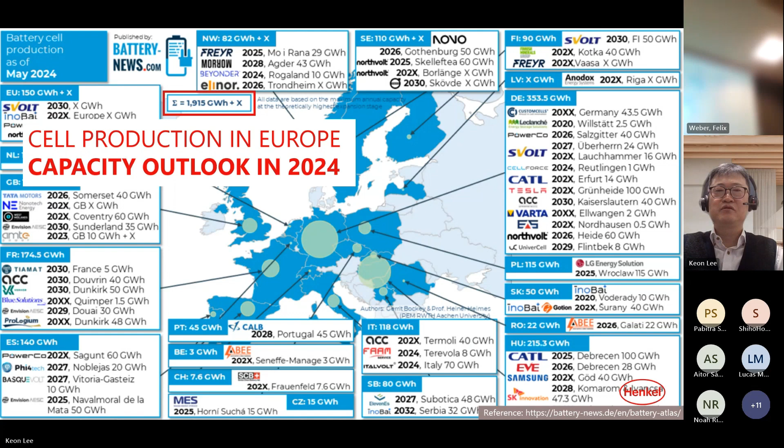Everybody is looking at this map, right? There are really a lot of projects for cell manufacturing inside Europe. And this is the picture which was recently published by Battery News. So there are still a lot of projects, and the total capacity until 2030 or so, you can expect actually 2 terawatt hours. But if you take a little bit deeper look, the numbers start to change. There are some projects that are already on hold or delayed in Europe. First, because of the slowdown in the front end industry. And secondly, some stresses from other regions, other continents. You can see that.

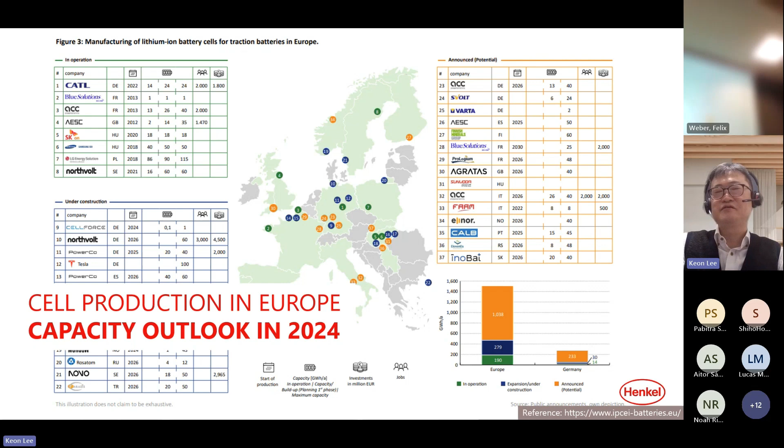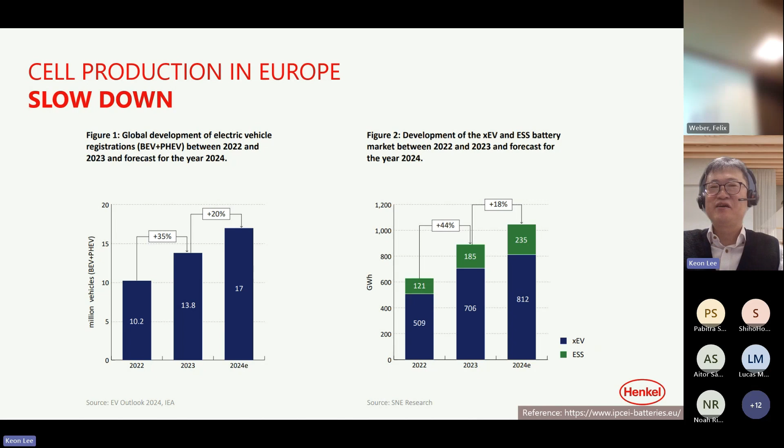So this year is pretty tough because we are seeing some sort of slowing down of the growth, because these numbers for this year were estimated last year, but this year I'm pretty confident that the numbers are much lower than this. And why? This kind of slowing down affects all other industries because they have to hedge the risk, and then you can see not really promising news here and there, starting from the company who canceled the plan to build a battery factory here in Europe, and also some not really good news about other companies. And ACC also just put some projects on hold. So this is a pretty difficult time.

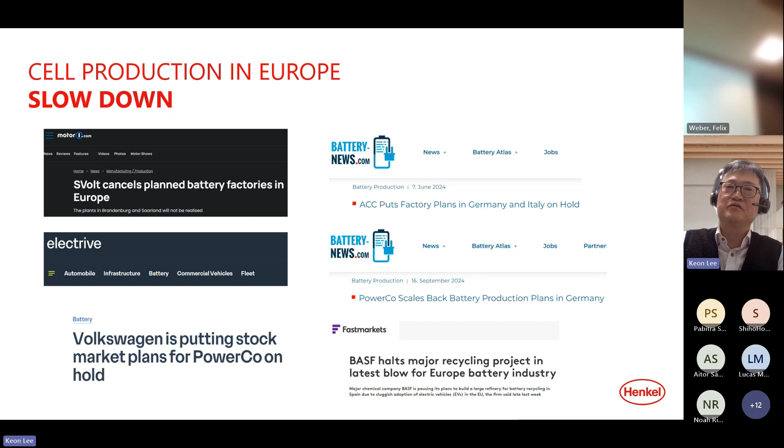And this is a massive one. And you can see some concerns about the future capacity. But I don't think it's a really bad sign, because when I just got here in Europe, I saw all those crazy numbers, and I thought, okay, that's just too much, because demand is demand, and capacity is capacity. They have to match, but the sum of the whole capacity did not match with the demand in the market, and also the supply chain maturity was not there. So I don't think it's a slowdown. I think it's more about the market being realistic, or more responsive to the customers.

So when it comes to the risk hedge, you can see actually almost half of the capacity, because of the slow consumer uptake of electric vehicles and also the competition from Chinese cell manufacturers. So today's focus is two things. The first, how we can do it better. Actually, just one, to be honest, because to do it better, we have to do it differently. So I'm going to talk about how we can do it better by doing it differently.

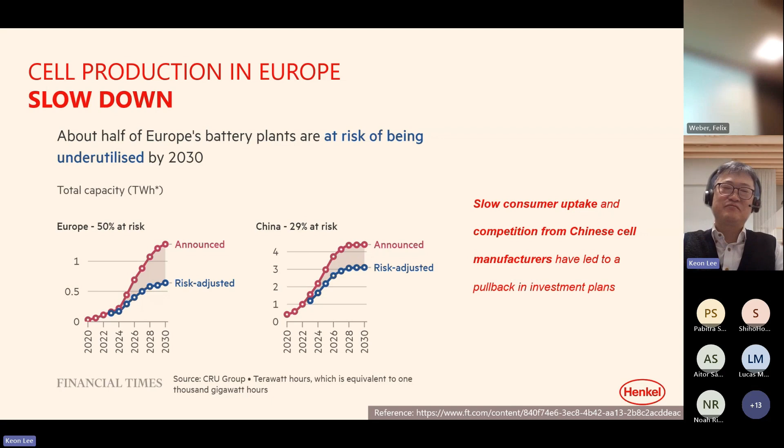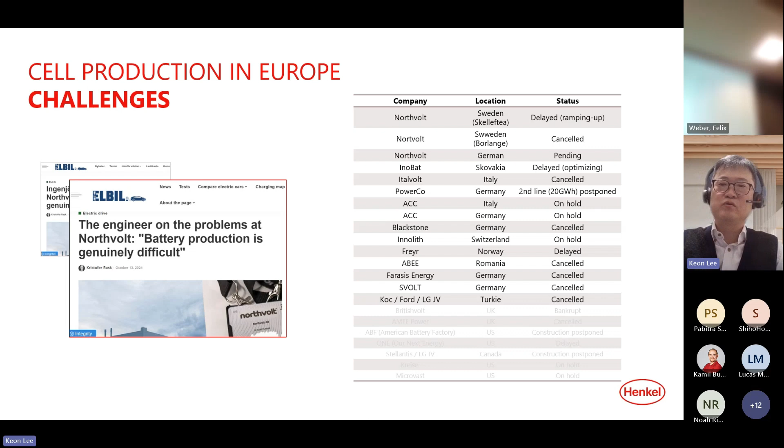And also, there is other news about Northvolt, which is not good, but a harsh fact showing how difficult it is to build up cell production capacity here in Europe. So Northvolt is struggling. I don't think it's going to fail, and I really hope that Northvolt will come back to its normal state, and there are a lot of other projects that are on hold, delayed or canceled. And this is pretty much provocative, so I'm just murmuring this. Recently there was an interview between one company and the CEO of CATL. And just take a look at the question.

What are the problems? I cannot recall the exact questions from his side, but he was asking why it is difficult to build good, decent cell manufacturing capacity here in Europe.

And the answers from the CEO of CATL were like this. First, wrong design. Wrong design means the wrong chemistry, or some wrong components, or the wrong constitution or architecture inside a cell. He made a second answer too, but let's approach it differently.

Secondly, he was talking about the wrong equipment. We have a lot of things to do, right? And thirdly, he was mentioning the wrong process too. But actually, I don't think the process and equipment are different things, so today I want to address them at the same time.

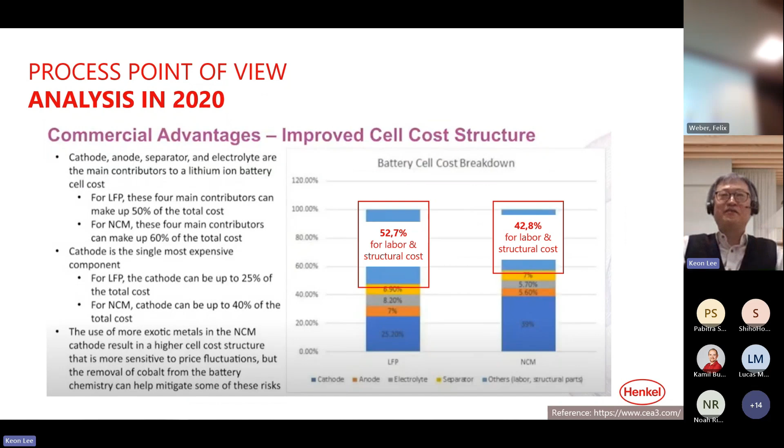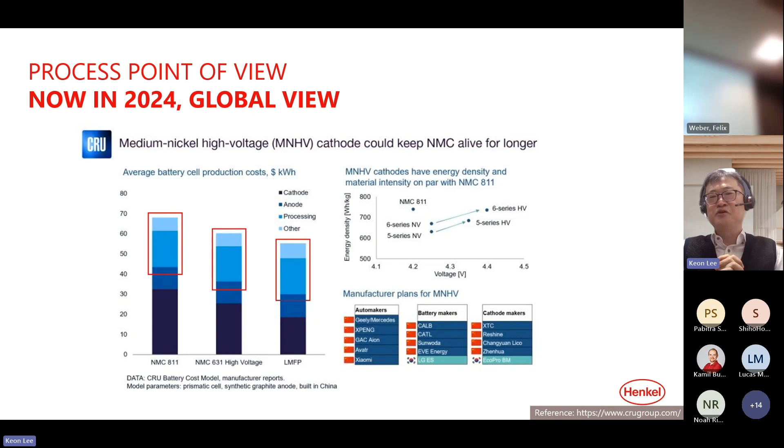We have to deal with this number. So let's go back to the global point of view. Someone thought that we could have many chances to improve a lot, but this is the harsh reality for our competitor—or maybe benchmark partner—and they are based on this cost structure.

Material cost, here in Europe, if you source from Asian countries, will definitely increase. But the structure is the structure. So even with increased prices of all the materials and components, you also have to deal with the increased price tags on energy costs, labor, and whatever.

Then how can we overcome this? There's actually one small factor that is highly likely neglected. I really love this article by Professor Kampker about how likely teamwork is to produce results, and then he was stressing the scrap rate.

Why is it important? You can read the sentence with the red line. The scrap rates in battery production are high, often around 30% when production starts. But as the process becomes well established, it goes down to 5 to 10%. Currently the leading companies are showing better numbers—they're not sharing the exact figures, but everybody says it's less than 3% in the fully established and stabilized lines. Typically it takes 2 to 3 years to get to that limit.

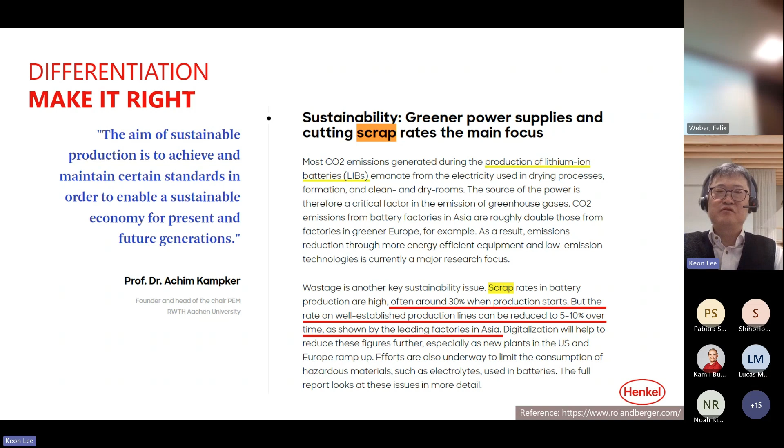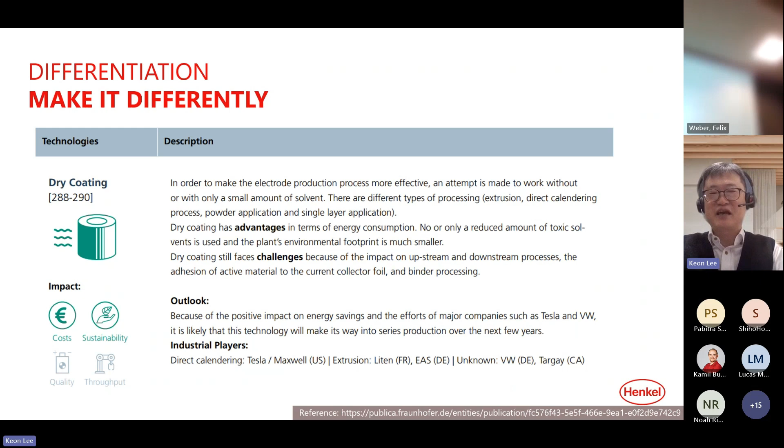And the second part would be interesting, because you can also think about other processes—dry coating. Maybe many of you, or all of you, have heard about this technology because Tesla made a really big one. But this technology has a longer history and legacy, and by the way, they started to use it.

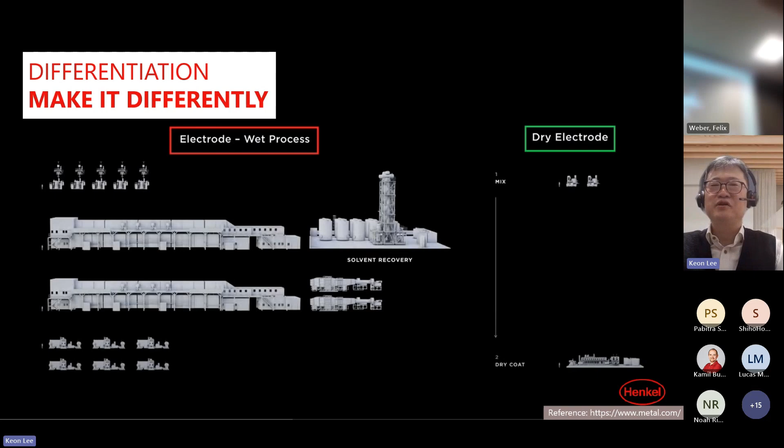They made this technology a big thing during their Battery Day, I think it was 2020. They compared the conventional technology with the dry electrode process, and the rough numbers we learned came from this presentation by Elon Musk.

Roughly, you can reduce the cost by 20% if you switch from wet chemistry to the dry coating process, and 50% of the CO2 will be gone. So this is a very promising technology.

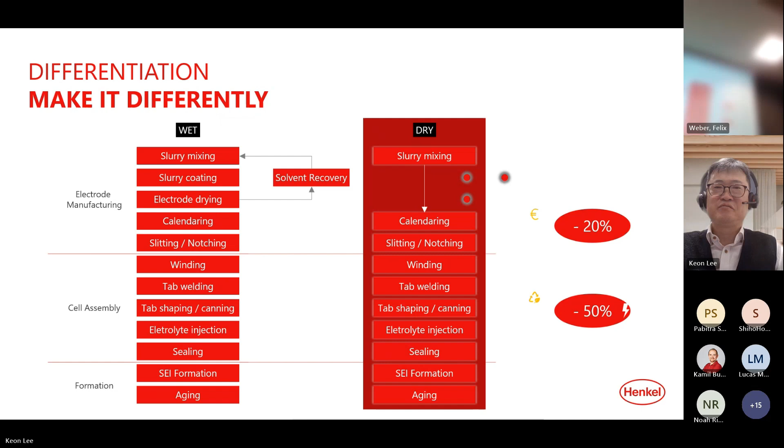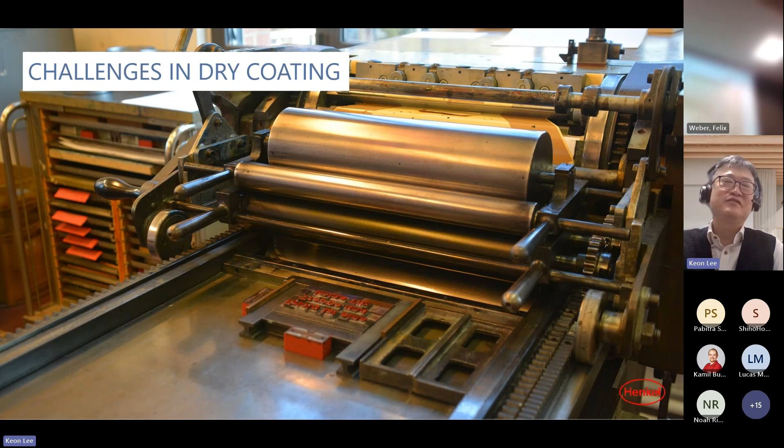But there is a trap, actually. There were a lot of challenges which have not been solved yet. I don't know how much you know about this company's current status, but two years ago they stated they started mass production with the dry coating process.

But actually there was a rumor that this process was used only for the anode side. It wasn't proven, but this year it was fully proven by their statement, because they posted on X saying 'first prototype Cybertruck with in-house dry cathode 4680 cells.' So they had been outsourcing the dry cathode, which means they failed to launch this dry process for the cathode when they started mass production.

But this is odd, right? Almost all the benefit, 90%, is based on the cathode side. But the dry electrode process wasn't used for the cathode side, which means the benefit was gone. Maybe in the worst case, the benefit wasn't even there yet - maybe only the disadvantage. Who knows, right?

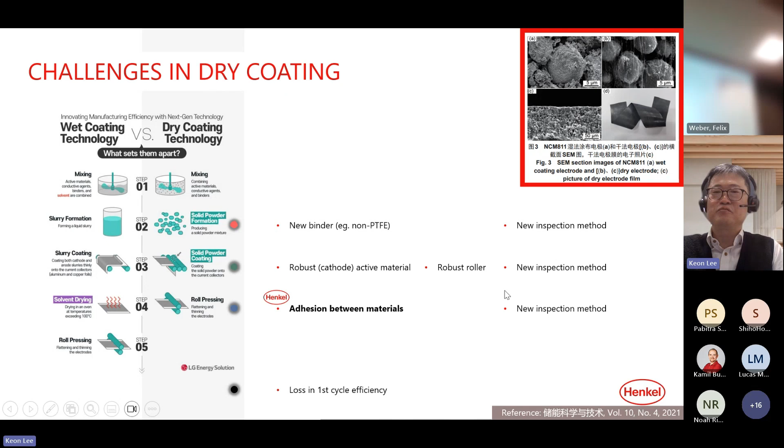There's always a problem about adhesion between the active materials and the current collectors, and this is where Henkel plays a role. The loss of first cycle efficiency was really notorious, and many people are working on over-lithiation or pre-lithiation technology - this loss is based on binder characteristics too, so some people are working on the binder system. When it comes to the machinery side, I think the robust roller would make a bit more sense.

So this is how Henkel helps this dry coating process by providing coating materials. Our coating material is applied onto the current collector first, and helps the adhesion between the active materials and the current collector. By doing so, you can actually decrease the pressure needed.

For instance, if you want to transfer the active layer onto the current collector, you normally have to press it hard - but if you use our material, you don't have to. Also, to make better bonding you'd have to increase the temperature, but if you increase the interfacial adhesion using this type of carbon primer, you can decrease the temperature too. This is how Henkel helps our customers realize the dry electrode process for their new lines.

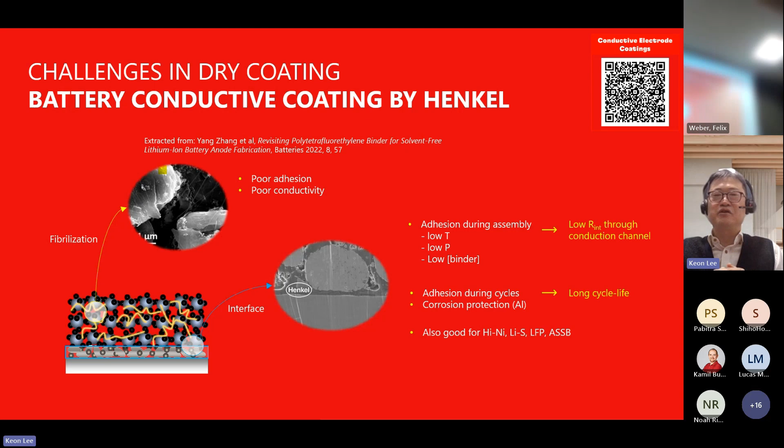Did it interest you? Was it interesting for you? Yes, it was. Okay, thank you so much for the talk. All right, thank you - this is pretty awkward.

Is there any questions from the audience, either here on site or also online behind me on the screen? Otherwise, I would have a first question.

At the beginning of your talk, you said a little bit about production costs, and we then switched into production technologies. I think it's all about the race — we always say it's a race between Asia and Europe. Do you think we have a chance to win the cost race? Or will it be in the end a technology race where performance counts more than cost?

I see only two areas where we can actually compete with the Asian manufacturers. The first one is the scrap rate, the perfection of the lines. The scrap rate is huge. If you go to a line which just started to be used, you can see a lot of scraps — even anywhere, absolutely, there is no exception.

But if you can decrease it a lot, you can actually save a lot of money from the beginning period. At the same time, that 1%, 2% is something we have to address. Labor, you cannot control, because if you go to the line, there are only a few people — even in China, you cannot see a lot of people in the line. So this is a pretty big misconception. You really have to focus on the scrap rate. If you can save like 1% or 2%, you can actually start to compete.